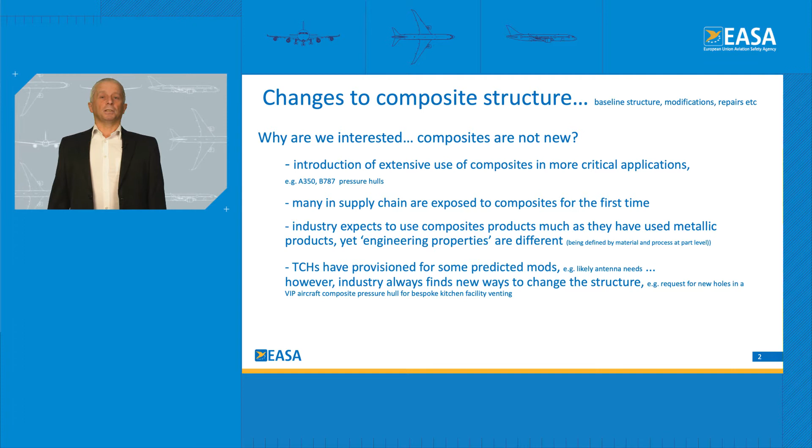For example, within months of the 787 certification, EASA received applications for VIP aircraft with bespoke kitchen venting needs relating to the fuselage structure. So what is the scope of the issue? Well, we're talking about change to composite baseline structures, composite additions to metallic baseline structures, metallic addition to composite baseline structures, and composite additions to composite baseline structures. So this is the breadth of the scope of this discussion.

So what examples are we talking about? There's a very simple one. It's the change of materials. This could result from a choice in terms of changing supplier, but it could be imposed by the result of other policy, for example, the REACH activities, which are removing environmentally and health and safety related materials from the supply chain. This changes your properties and requires review of your design.

But obviously we are talking more distinctly about antenna, winglets, sharklets, interior structures, composite seats, bonded structures in general, and we even have to consider thoughts such as the addition of decals and vinyl wraps to aircraft, which change damage tolerance in terms of inspectability, damage generation, etc.

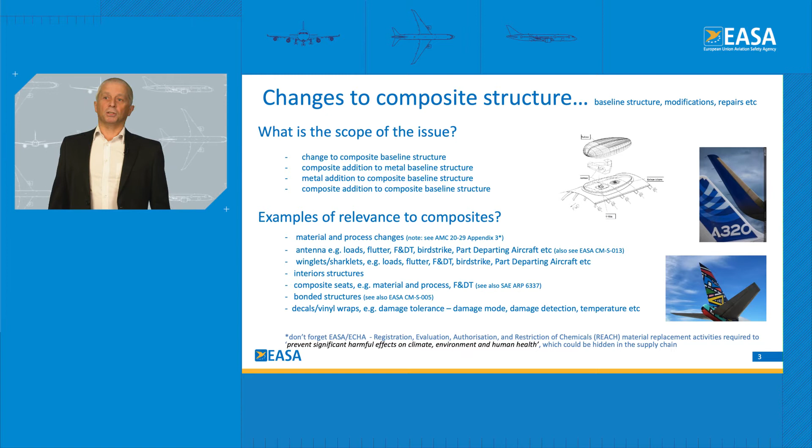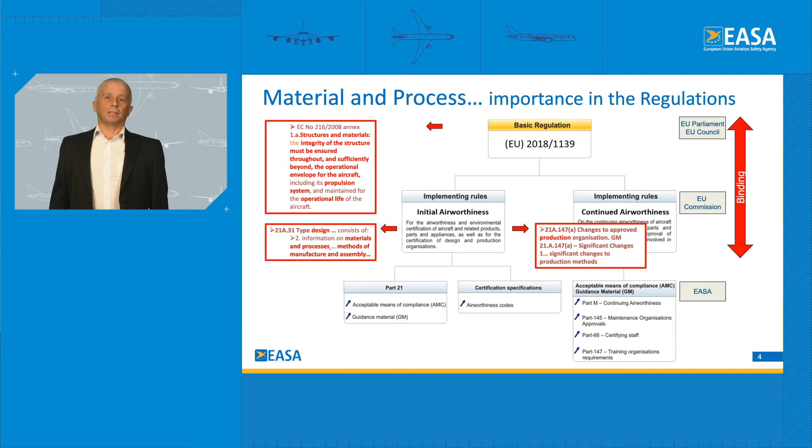So a reminder that regardless of whether you're engaged with the baseline structure or an alteration, the need to consider material is very high in the basic regulation. It's binding. You need to consider structure and materials which will be good for the operational envelope and beyond the operational expected life of the aircraft. Furthermore, this is wrapped up in the type design. The definition of the product includes the need to identify material and processes, and also fabrication methods. Obviously, the production activities may be changed accordingly.

And then in the non-binding material, we have the CSs and guidance material, for example, CS 25.603 addressing materials, which provides some high-level guidance to expectations. This applies to you as somebody changing a product. This is further backed up with guidance such as AMC 20-29, composite aircraft structure.

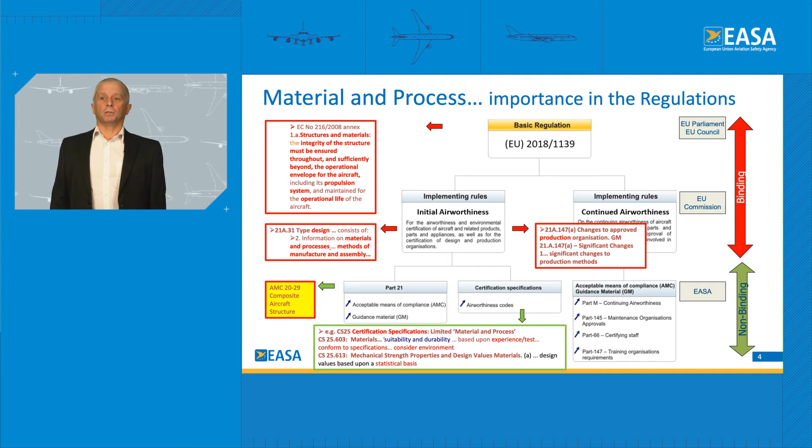So composites are interesting materials. The properties are built into the part or the repair. This matters if you're in the user community, because you will now be generating these properties perhaps in a more challenging environment than the original manufacturer. So you need to understand them. Furthermore, the parts tend to be more complex. For example, we have reduced part count, which results in a more complex part. This is possible by methods such as composite material application.

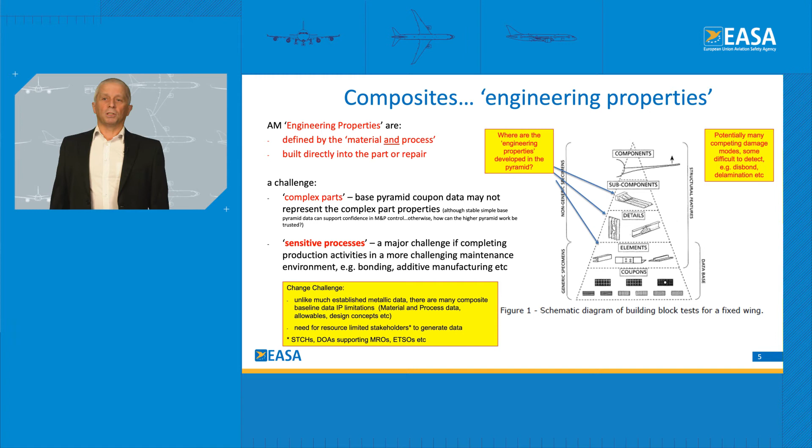These processes are sensitive, and we have a challenge that these properties provide complications in terms of determining where you're driving your failure modes. What are the driven failure modes? Do you have competing failure modes? What are the engineering properties? Where are they defined in the pyramid? So this is a big challenge, and a lot of this information is intellectual property for many manufacturers, whereas a lot of the data for metallic structures and metallic materials exists in the public domain.

One basic key regulation is CS 25.605 fabrication methods. This basically requires that any process that requires close control be covered by an approved process specification. Perhaps more importantly, new aircraft fabrication methods must be substantiated by a test program. That's a big challenge for a lot of small companies engaged with alterations.

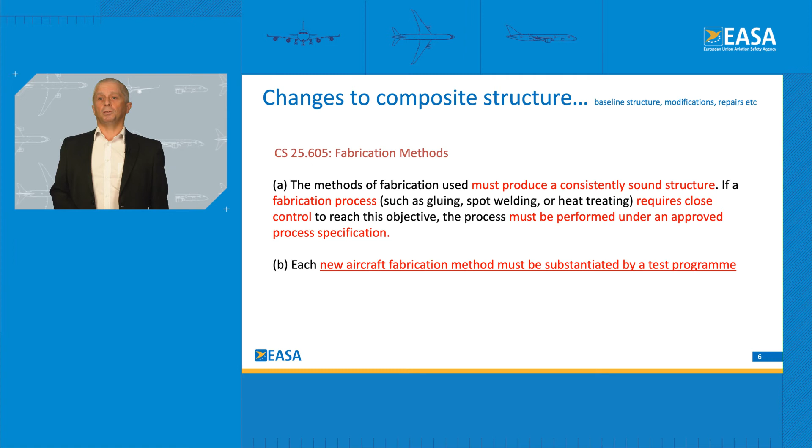Let's jump back to the basic regulation. We are now moving towards performance-based regulation. This is a higher level, more generic requirement set where we are looking for equivalence in terms of safety levels. In terms of practical management, we also have the associated recent level of involvement requirement, Part 21.B.100, where we're expecting to deliver certification effort in proportion to a number of parameters. For example, novel and unusual features, and that's novel or unusual to the industry and/or particular organisation. Furthermore, we're adopting proportionality in effort in proportion to criticality of the application. This is important.

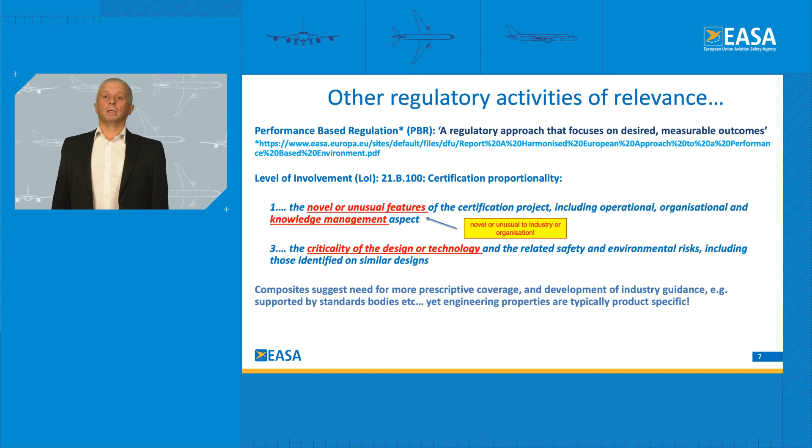So, a quick example based on history. In the metal world, we have a long-established practice of accepting changes such as the installation of small antennas involving small penetrations of pressure hulls. This is based on established practice.

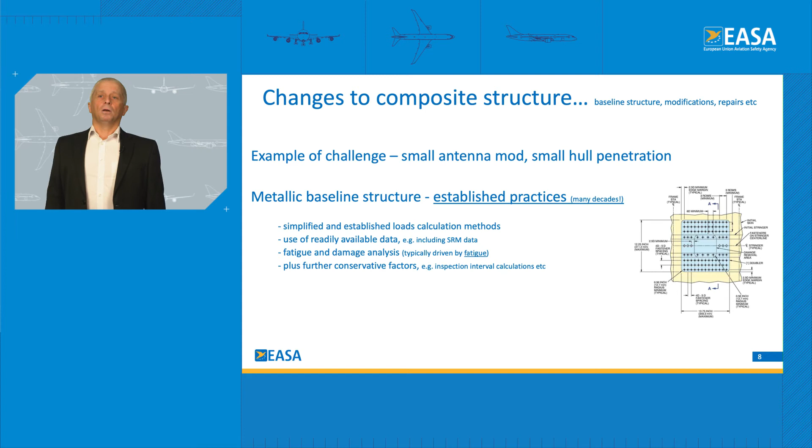We've had simplified and established load calculation methods, use of readily available data in the public domain, common recognised practices relating to fatigue and damage tolerance, and further use of conservative factors. This has resulted in many decades of successful and safe application for metallic antenna.

So when we consider repair or alteration to a composite pressure hull, we cannot necessarily assume that the same established practices apply. For example, if we consider the small antenna being applied to a composite pressure hull, if we think about the simplified load calculations, the anisotropy and variability of the properties challenges your assumptions about those calculations. The data that's available to you is probably much more restricted.

It will be intellectual property, probably. For example, fastener allowables in a specific material for baseline structure will be unique to that supplier or manufacturer. We have to think about the assumptions that were made in the original design, for example, the damage tolerance assumptions, and what was substantiated in that original design, particularly if we are impacting baseline structure.

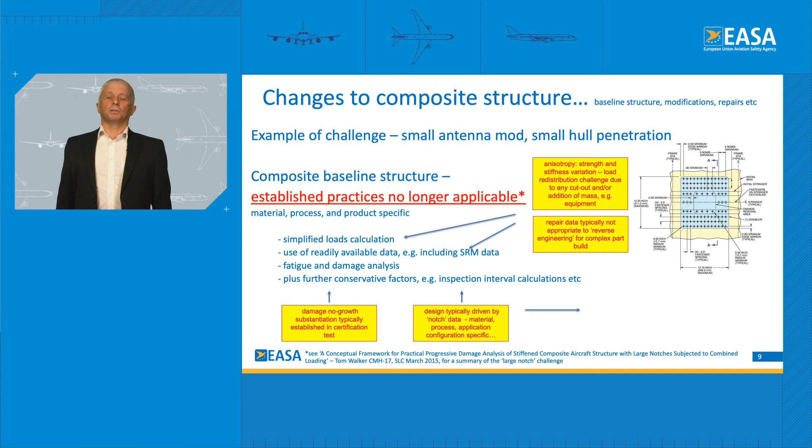And we've got to remember that a lot of these properties include key elements or considerations such as large notch data. This is fundamental to your understanding of what you can achieve or not achieve in such a situation. And depending on the material, you have these competing failure modes, ranging from brittle to ductile via quasi-brittle. So a lot of challenges if you're a small organisation without access to appropriate data.

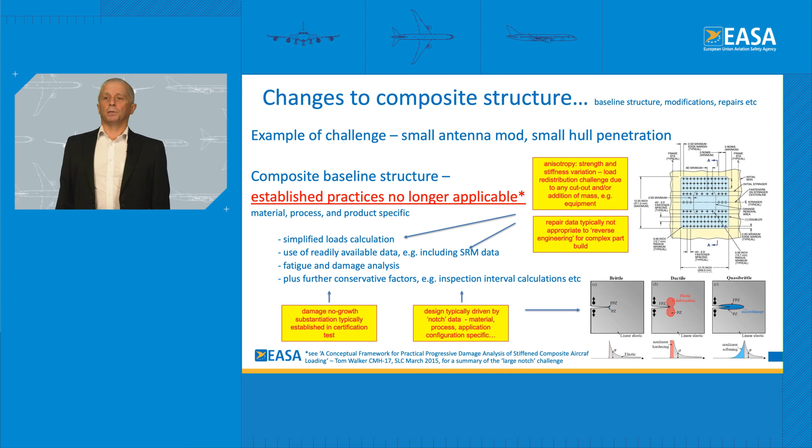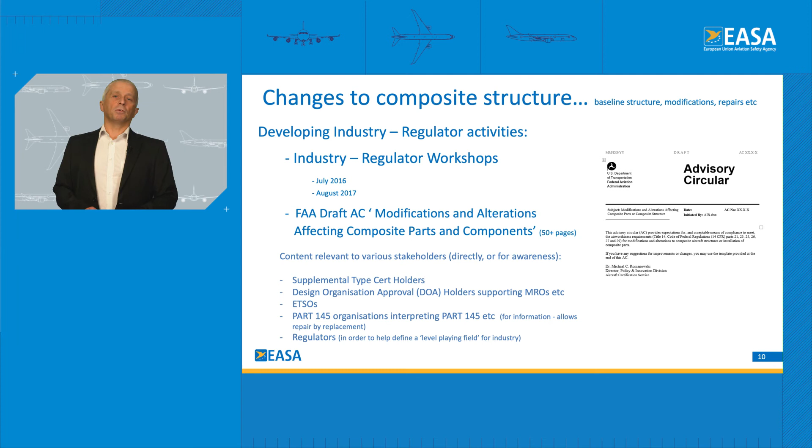So recognising that this has been coming for some years, industry and regulator workshops were developed in 2016 and 2017. The outcome at that time was a draft AC from the FAA called Modifications and Alterations Affecting Composite Parts and Components. This was an extensive document intended to provide guidelines primarily for STC holders, design organisations supporting MROs, ETSOs, Part 145 organisations in terms of perhaps a guidance document, perhaps better improving the understanding of what is achievable or not achievable under the scope of repair by replacement. It was also a document intended to provide a level playing field for the regulators.

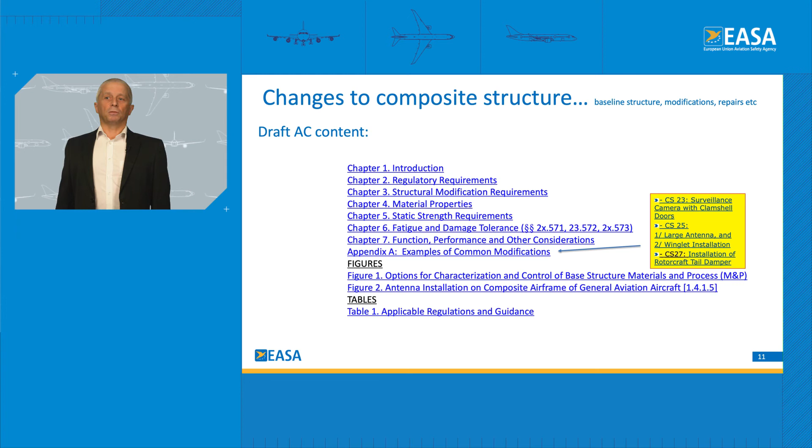The content is much as expected. We have the usual subjects, including material properties, fatigue and damage tolerance, but importantly, there is an examples section which is quite extensive. It covers CS23 regarding camera with clamshell doors. We have several examples for CS25, that's large antenna and winglet installation. For CS27 we have installation of rotorcraft tail damper.

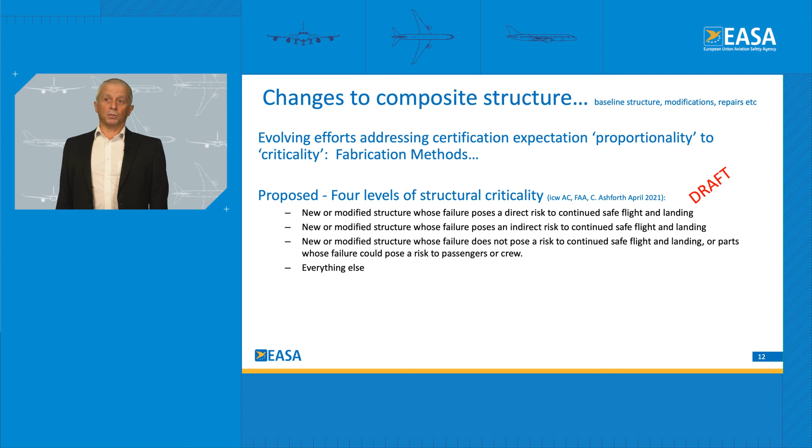So this evolving effort is tuned into the idea of proportionality for certification. So 4 levels of criticality have been proposed, noting that this is a draft document, ranging from new and modified structure whose failure poses a direct risk to continued safe flight and landing, through to consideration of indirect risk to the airframe in terms of continued safe flight and landing, through to everything else.

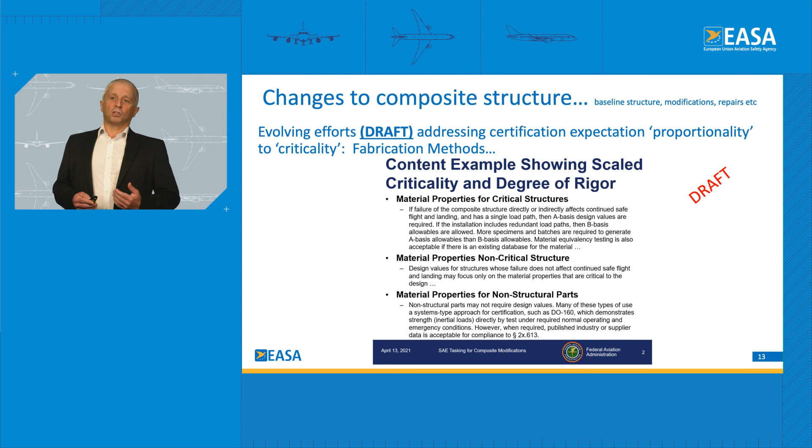Accordingly, how we manage properties and material properties is stratified in a similar way. For critical structures, the consideration is again in terms of A and B basis data, which we are well familiar with. Then we move through less critical applications where we accept some level of point design, down to basically non-structural parts and non-critical parts where there's some acceptance perhaps of material manufacturers' data, application of unique detail testing, possibly similar to the higher level point testing. So again, the key point is stratification in proportion to criticality.

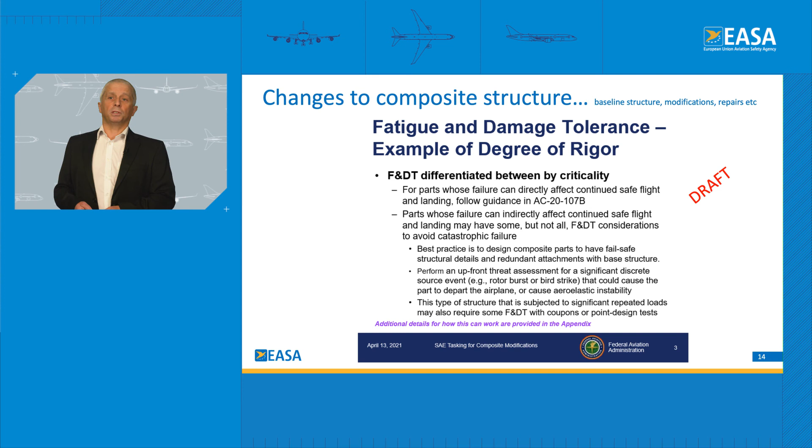Similarly, F&DT, fatigue and damage tolerance, this brings a potentially large threat to small organisations in terms of the limited ability to be able to produce extensive test work at a very high level in the test analysis pyramid. So proportionality is also stated here, where we propose perhaps some level of coupon testing, for example, open hole testing as a good way of gaining some conservative results in some situations. So this proportionality is reflected in this test set.

If we look at an example, the large antenna, which is also discussed in more detail and more broadly than composites in another presentation in this workshop, we can look at how we can manage the extent of testing: coupon level testing, perhaps some cyclic testing may be required at the element level, perhaps some residual strength testing with various damage states applied to the part. But the important point here is the proportionality recognises the criticality of this application and potentially eliminates the need for full-scale cyclic loading for antenna and radome.

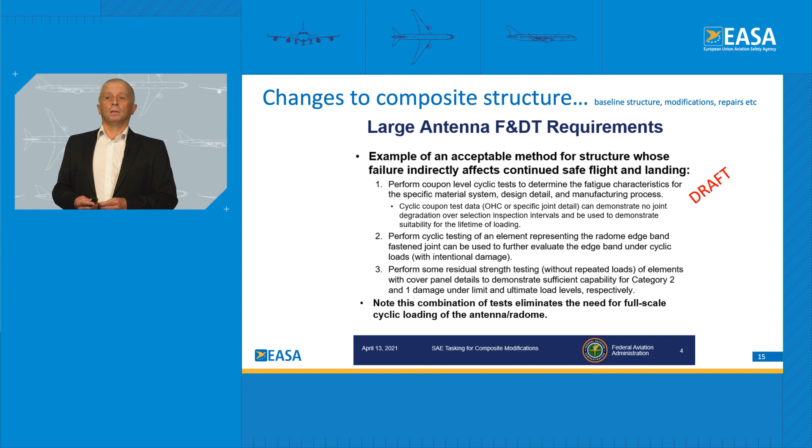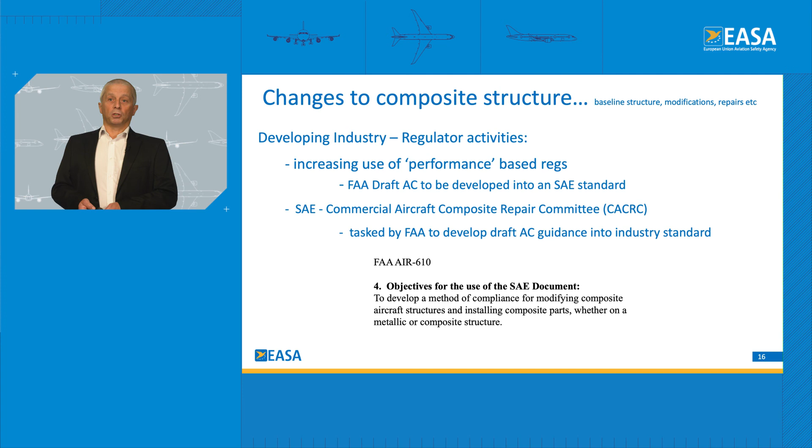So developing industry regulatory activities, the increased use of performance-based regulations is increasingly impacting the regulators. And the FAA Draft AC, which has been in existence for some time, is now to be developed into an SAE standard. The CACRC, the Commercial Aircraft Composite Repair Committee, has been tasked by FAA to turn this AC into a standard. This is the instruction with the objective making that point. And the intention is for this evolving document to be produced sometime in May 2022. So please be aware that you'll probably hear more dialogue in the open forum on this subject in the very near future.